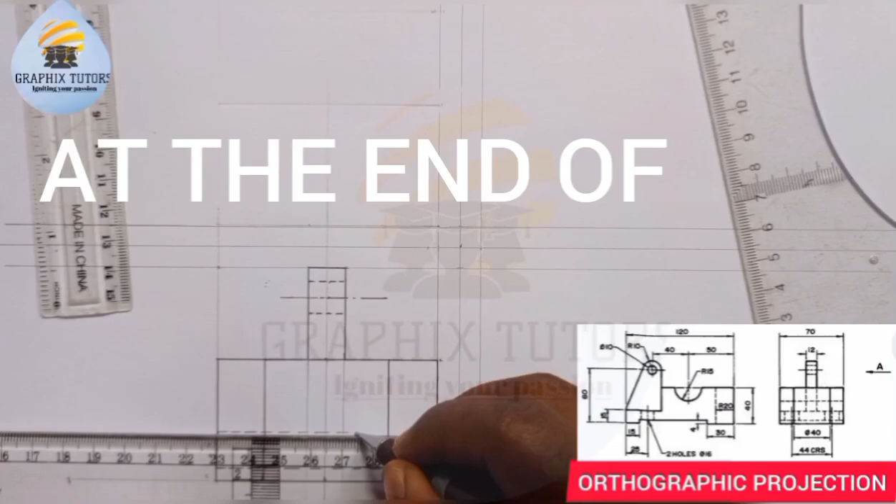Today I want to solve another problem involving orthographic projection. The question says two elevations of a bearing base are given. Do not draw these views, but draw a new front elevation obtained by viewing the given end elevation in the direction of A. From this view, project an end elevation on the right hand side, and a plan.

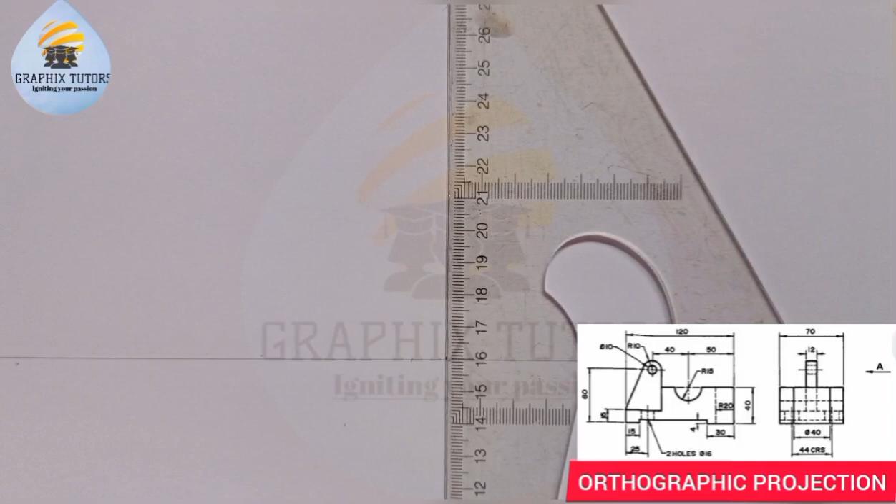Use third angle projection. Since it's orthographic projection, the first thing you have to do is draw your horizontal and vertical lines this way, this line, and also this line, all together. So this is what we have.

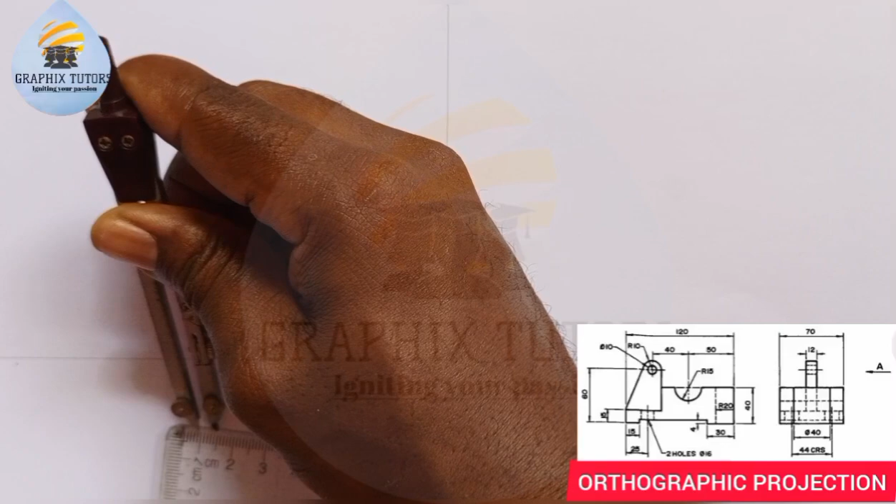Now you take your compass and measure 5mm each. If I take my 5mm from my instrument here, this is 5, right? Then you give a radius of your choice, place it here, and mark up, left, right, and down.

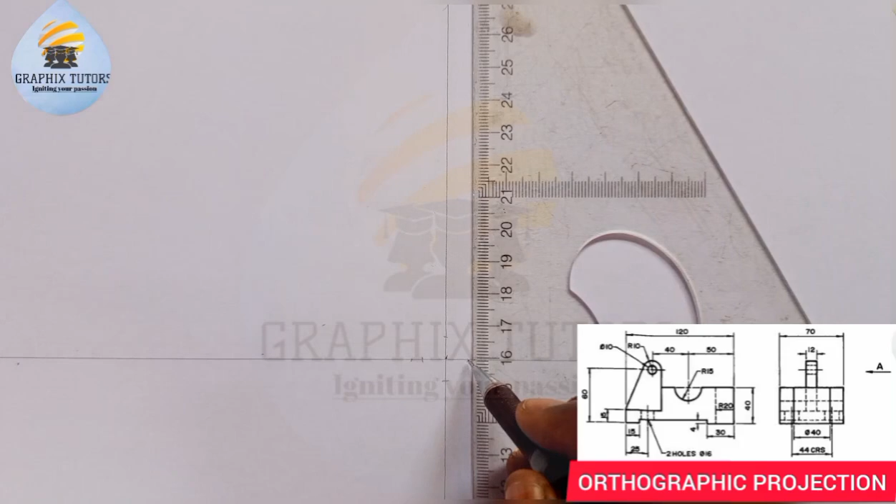So I'm going to project this upward, and this also upward. Then I'll do this in this manner, and also this in this manner. So this is the first thing you will do. Now I can just take this way.

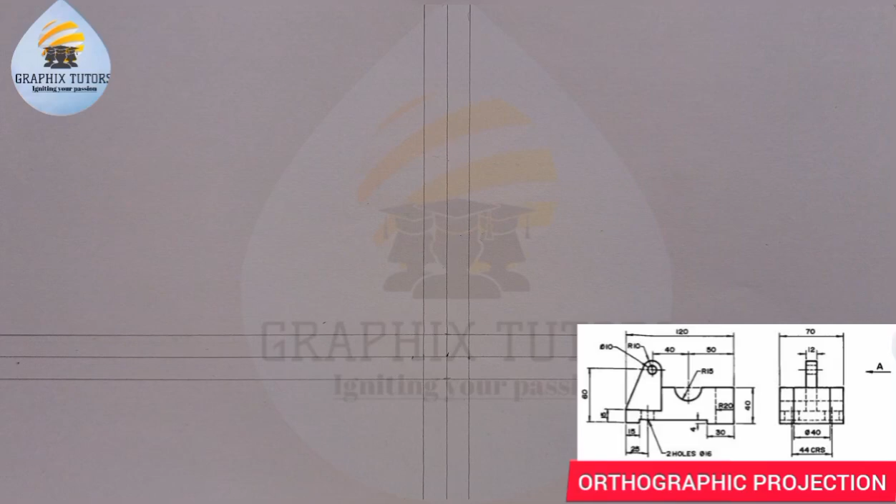Now the next thing you will do here is replicate that diagram you can see. We should look at the direction of A. According to the question, if you view the diagram facing the arrow here, this diagram will now be my front elevation. Since I am projecting it from this direction, this will be my front elevation, so I am going to draw this diagram back.

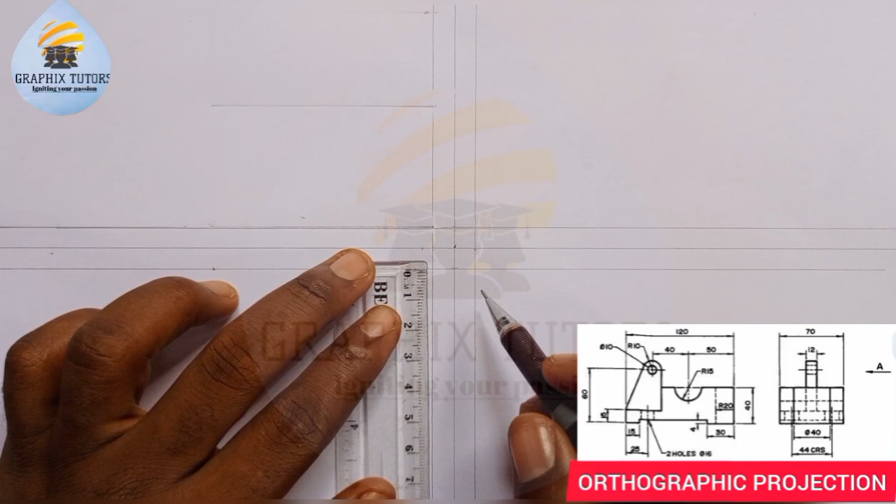We'll start drawing our diagram from here, static here now. So this diagram here, the entire length is 70, so I'll measure 70 from here. This is 70. And the entire height is also 70, because 60 plus radius of 10 here will give us 70. And I'll close it up.

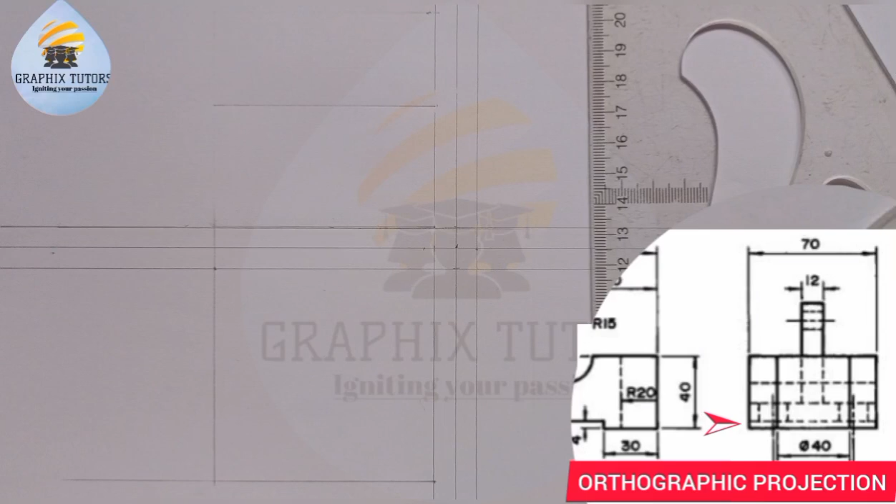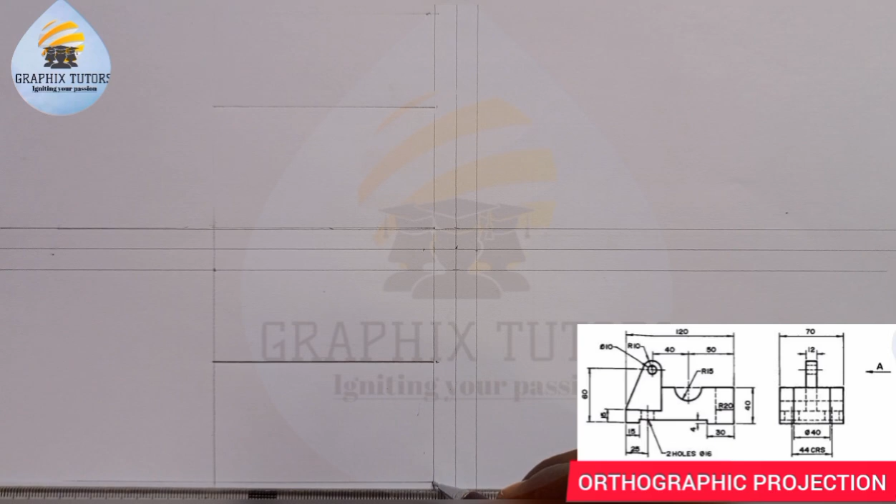Then the next thing is the thickness from here to here is given to be 40. I'm drawing this diagram first of all, so we have 40. So I have 40 here, and I'll close it up using a thick line, and I'll close it up too, and again, and again.

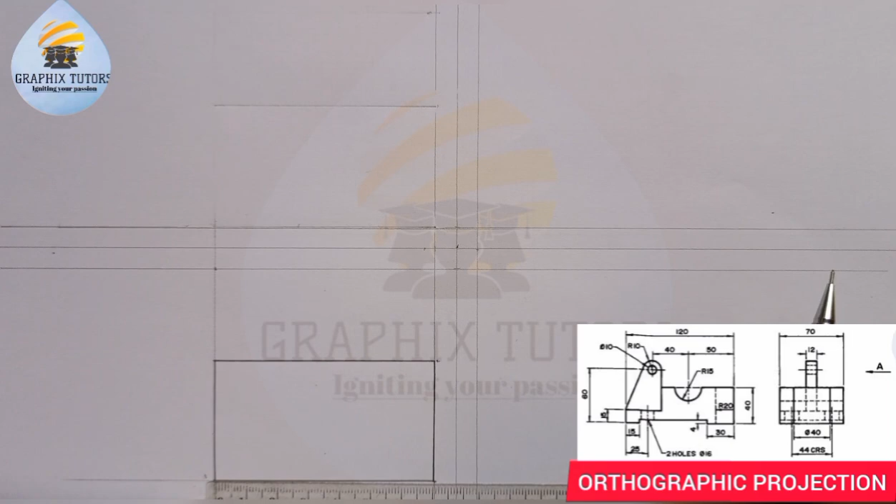So the next thing is I'm going to get the center of this line from here to here. Since from here to here is 70, half of it will be 35. I'll take it up. So from this point, the thickness is 12, so I'll measure 6 to both sides. This is 6 and this is 6, and I'll take it up.

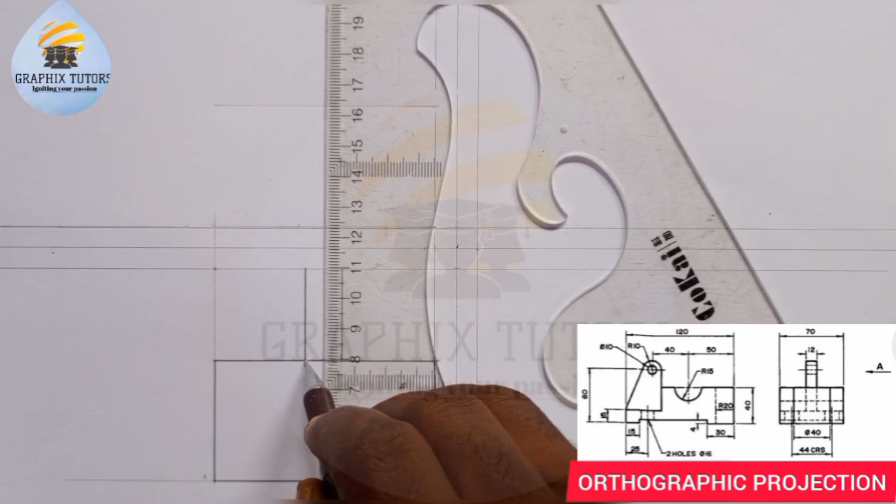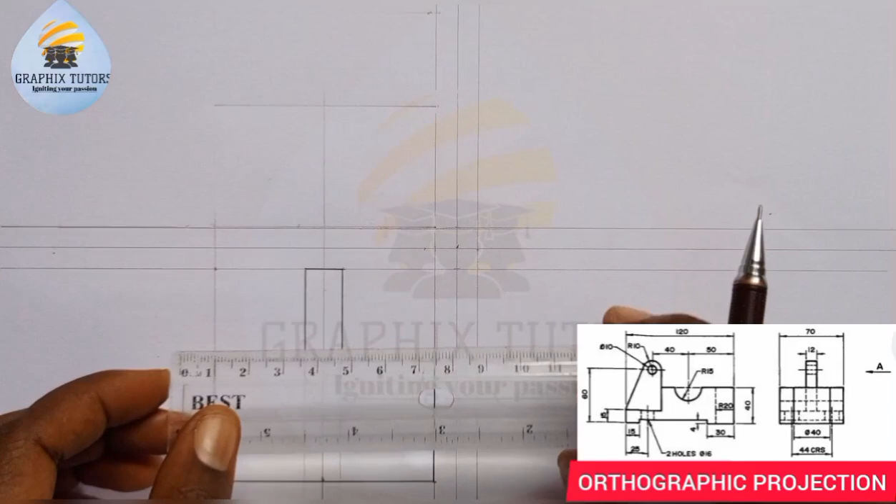And I'll close it, bringing my faint line down this way, and I'll close it up too. Now the next thing is from here, the radius of this inner circle is 5, because the diameter is 10. So I'm going to measure 5 each at this point here. This is the center here, 5 here. That's what we have there.

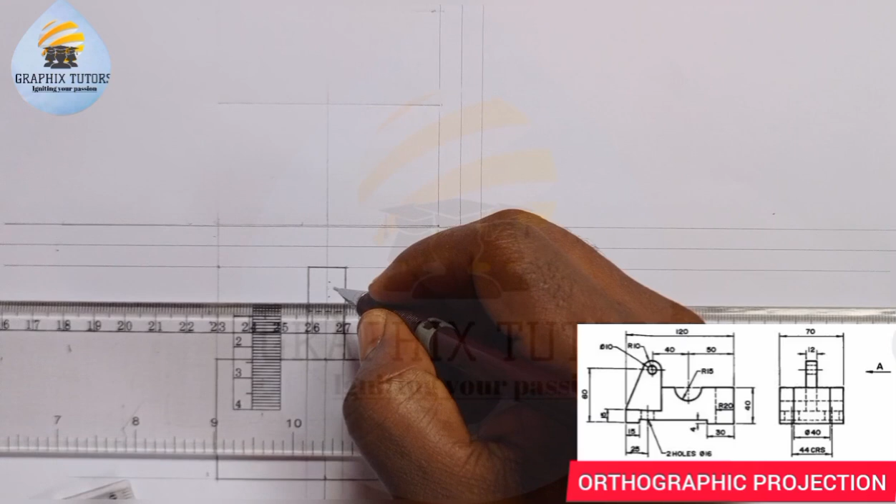So I'll just draw my hidden line here, and my hidden line here, then a center line here. So there's a circular object there.

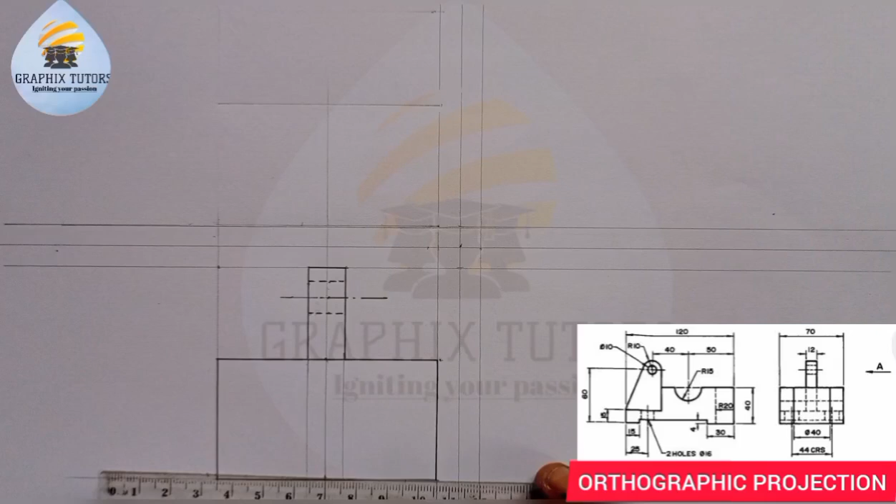Now the next thing is this true line from here to here has a diameter of 40, so 20 in between. Starting from here to the left, this is 10, 20, and to the right 10, 20. And I'll take it up and thicken it, and thicken it.

Now the next thing is the thickness down here from here to here is 4. So it's a hidden line we're using there, so I'll measure 4 downwards. This 4 here, and I'll close that up.

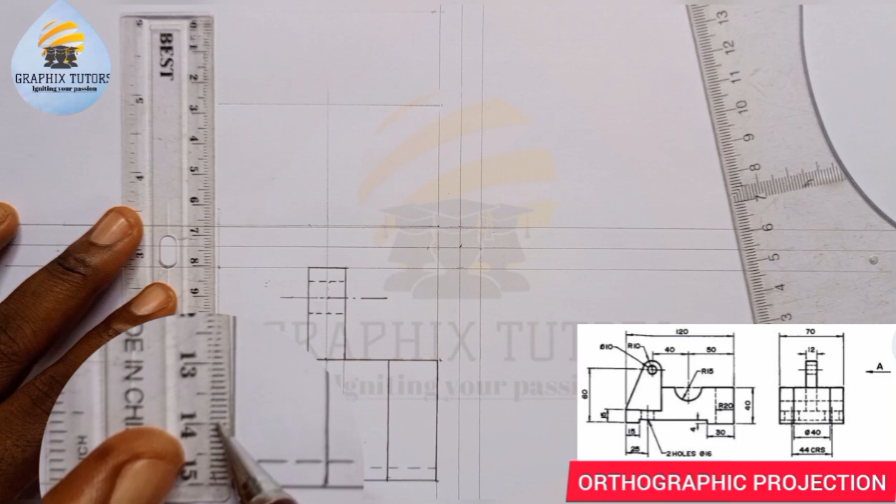And the next one, the height from here to here is 15. So from here to this hidden line is 15, so I measure 15: 0, 10, 15. And that'll be another hidden line.

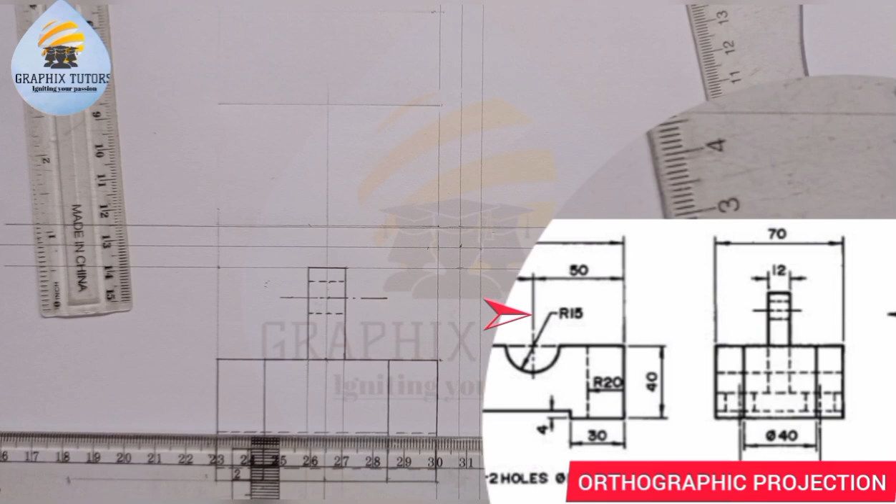Then the next one we're doing is from the top here downward, we have a radius of 15. From this side here, I'll measure 15 downward. This is 15 here, and I'm going to draw a hidden line.

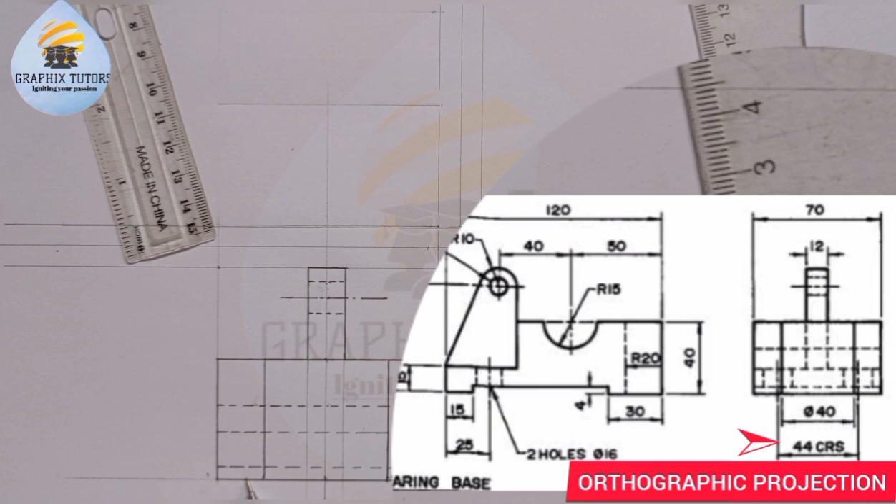And the next one is a circle. We have two circles here with a diameter of 16. To get the center of each circle, since we have 44 CRS, from this center I'll measure 22 to get the center of the first circle, and another 22 to get the center of the second circle. So I'll put it this way: this 10, this 10, 20, 10, 10, 20, 22, 22. So this is where the other circle will look.

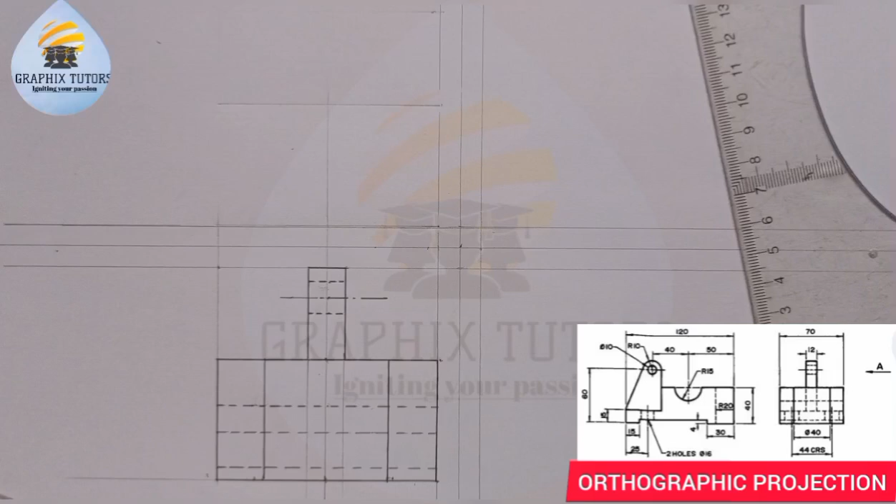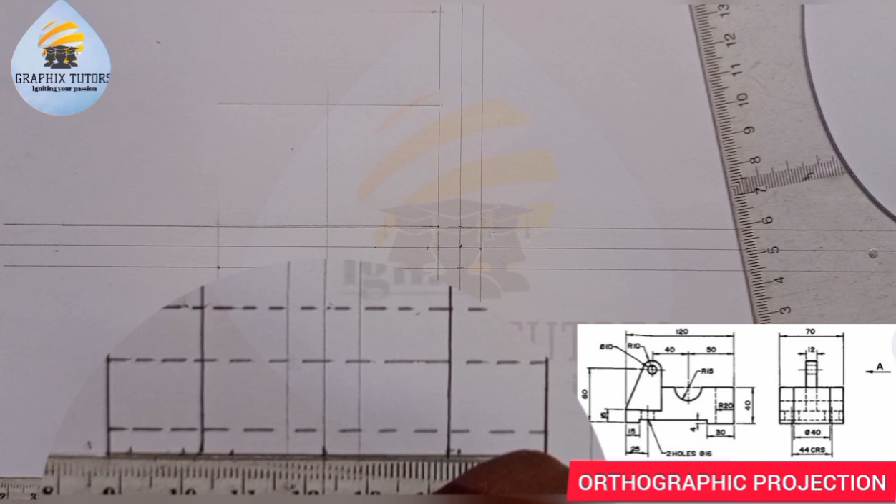Since it's a diameter of 16, here you measure 8 in both sides from here. So from here, this is 8, and from here also, this is 8, and that will be 8. Since we're having a diameter of 16, we'll measure 8 to both sides, altogether 16. So I'll come here also, I'll do the same thing. This is 8, and this is 8. So I'll just use my faint line.

Now take it up from this line here upward as a hidden line, and from this line here upward, hidden line. I'll do the same thing here too, and the same thing here too. So this is what we have.

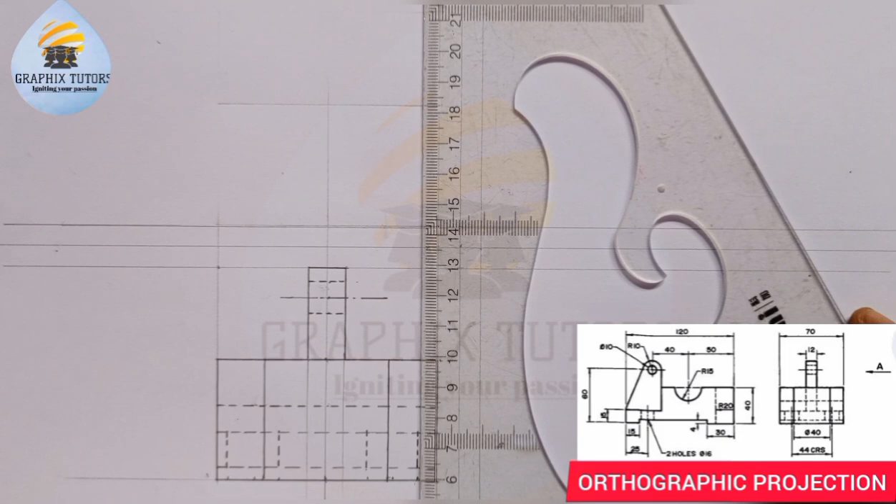I can easily bring this to touch 15 here, because this is touching 15 from here to here. So I'll bring this down to touch this hidden line, showing hidden features.

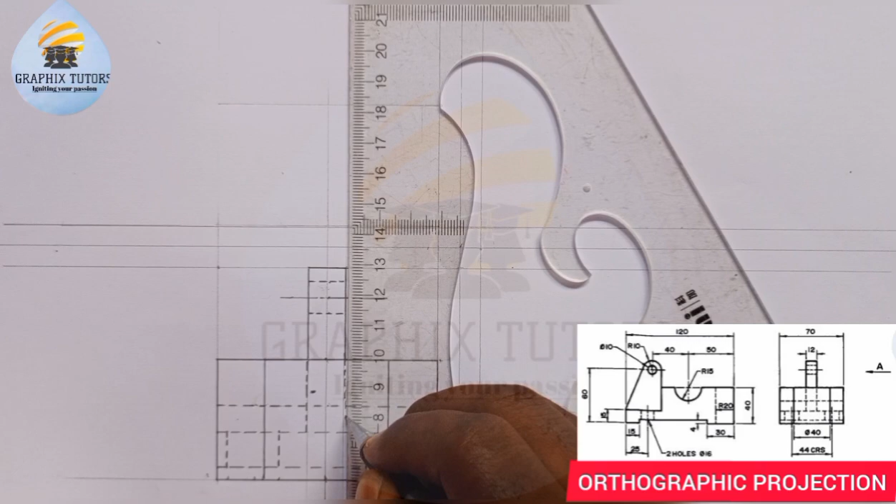This is what we have here. So I have reproduced this figure here that you can see.

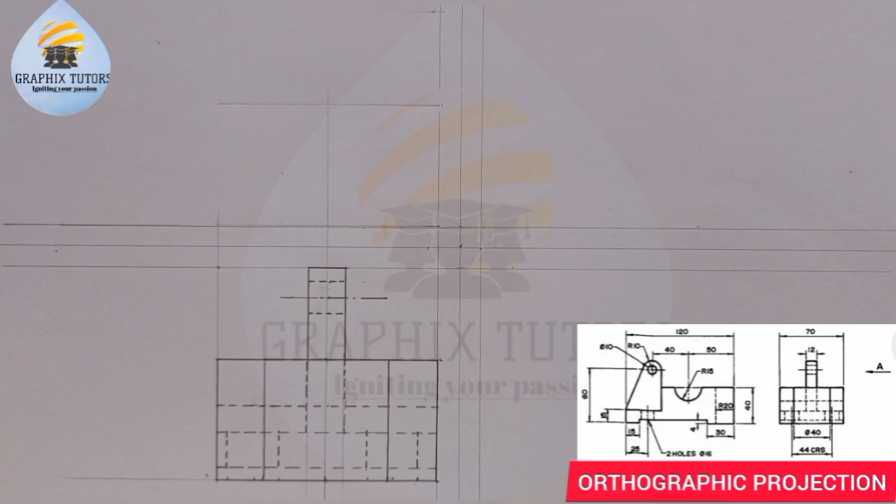Now the next thing is, when we're projecting it and looking at it, pointing at it this way, after the end elevation, what comes close to it? The front elevation, right? So my front elevation will be this.

Let's draw it this way. This is my front elevation here.

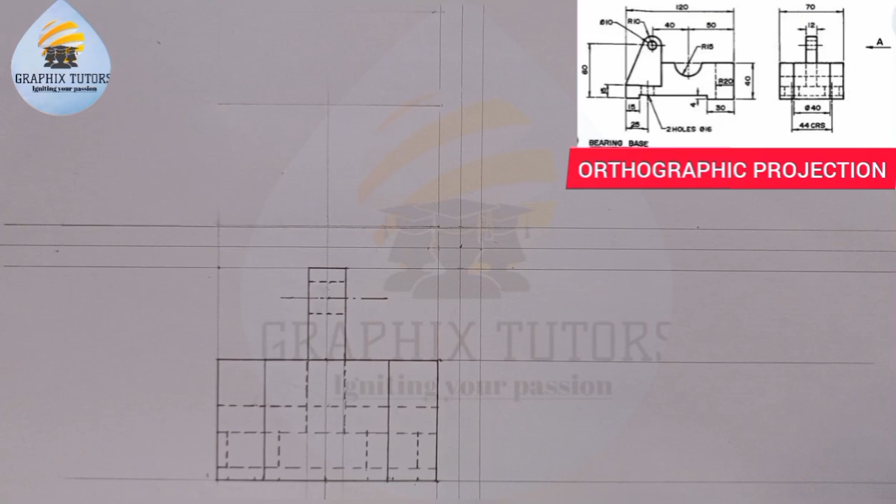I'll measure a distance of 120, from here to here, because the plan and the front elevation have the same length. So this is 120, and from here I'll measure 120.

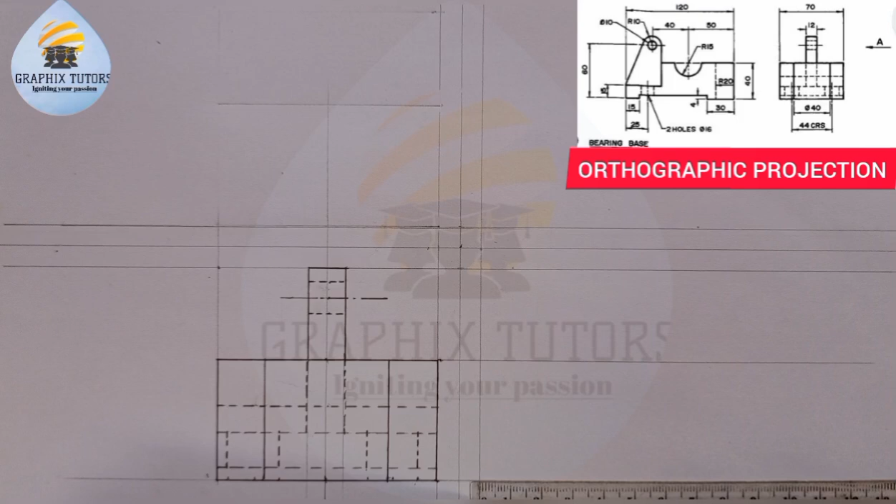Can you see that? Let me take it up a little bit so you have a view of it. So 120, from 0 to 120. And I'll take it up.

Now the next thing I'll do is you can easily project all these points here. I'll project all these points to meet at the other side.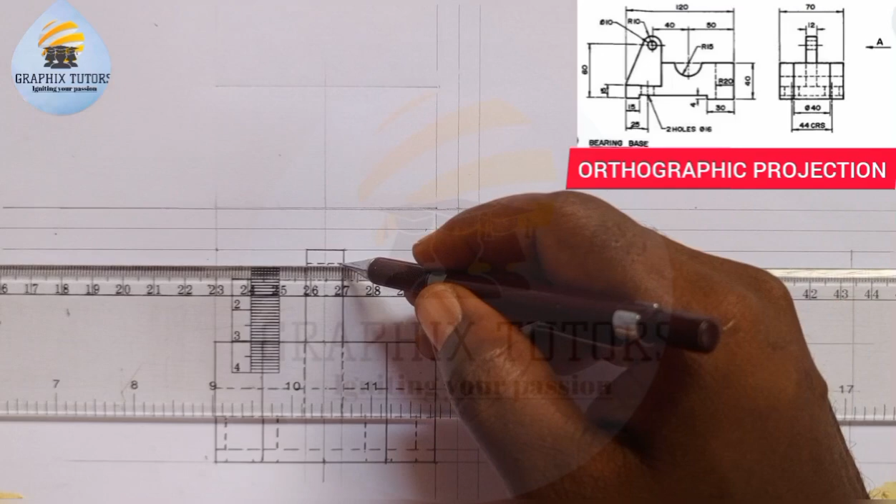Those faint lines, that's what I did here. So let's start. Now the front elevation here will be what you're seeing here. So let's see what will happen. What will just replicate will be this diagram here. It will replicate. So let's start.

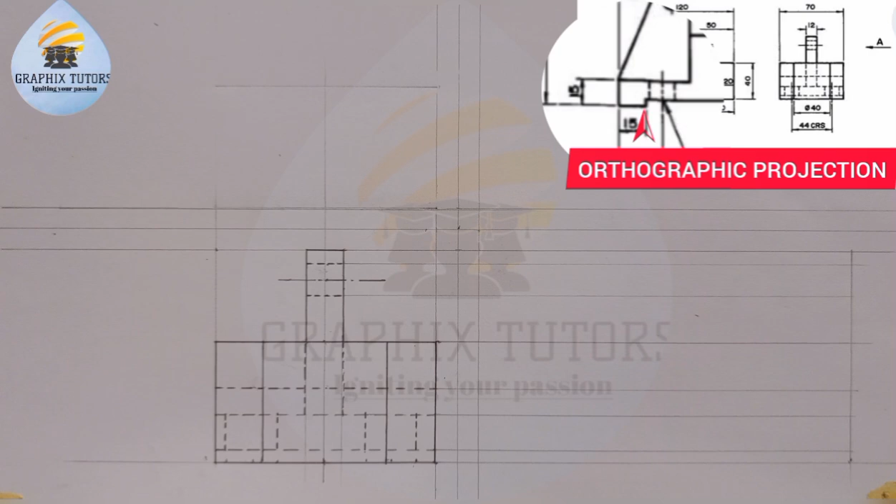From this point to this point here is given to be 15, and I'll measure 15. Measure 15 here, this 15.

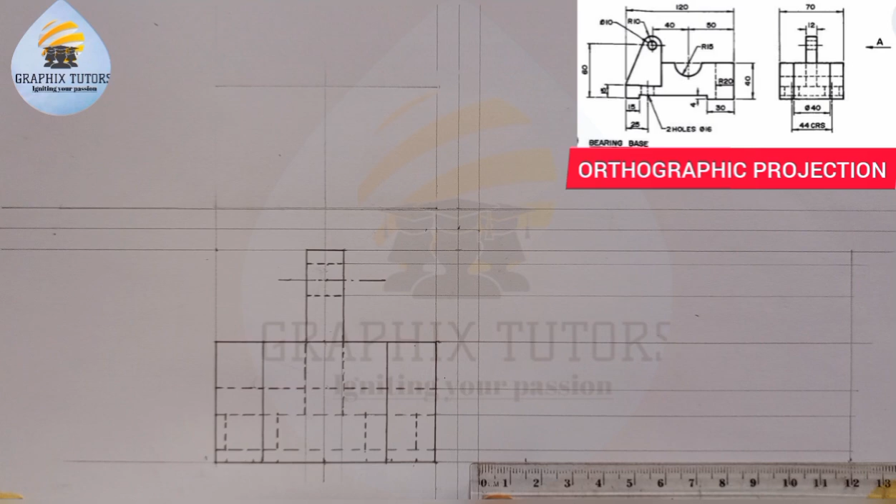And the next one is I'll thicken it, because in the diagram there it is thickened. 15.

And the next one is from here to here is 30. So I'll measure 30. Is 30 here, and I'll also thicken it.

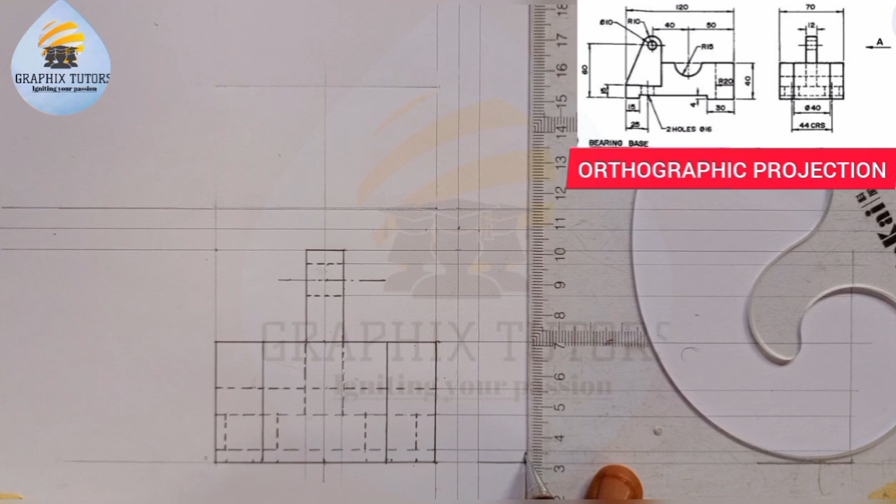You see that? And I'll take it up on this point to touch here, and from this point to touch here. Then I'll go to close here up.

Now the next thing is from here to here is touching this point here, 40. So I'll measure 40 upward.

And the next one is from here to here is 15, so I'm going to measure 15 upward here. This is 15 here. So I'll take it upward.

From this point to this point here is 15. And I'll measure...

I'll get the center. From here to the center here is going to be 50. Now measure 50.

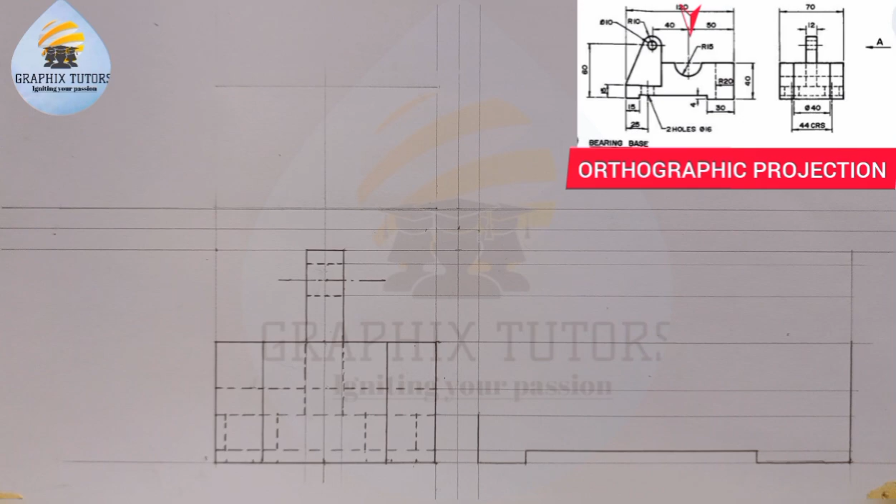Now draw the line that way to just use the center point, this point here. And the radius of that circle is given to be 15. Now I'll measure 15 this way.

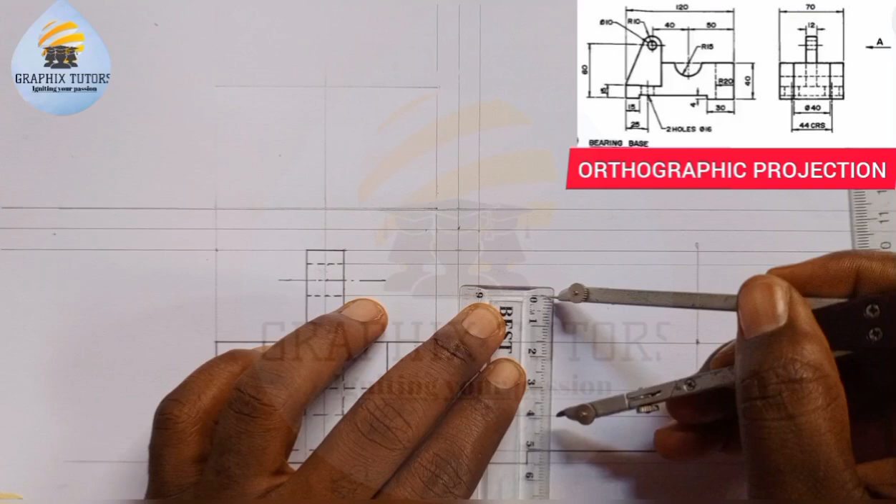You see that? Now place it here. Now draw a semicircle.

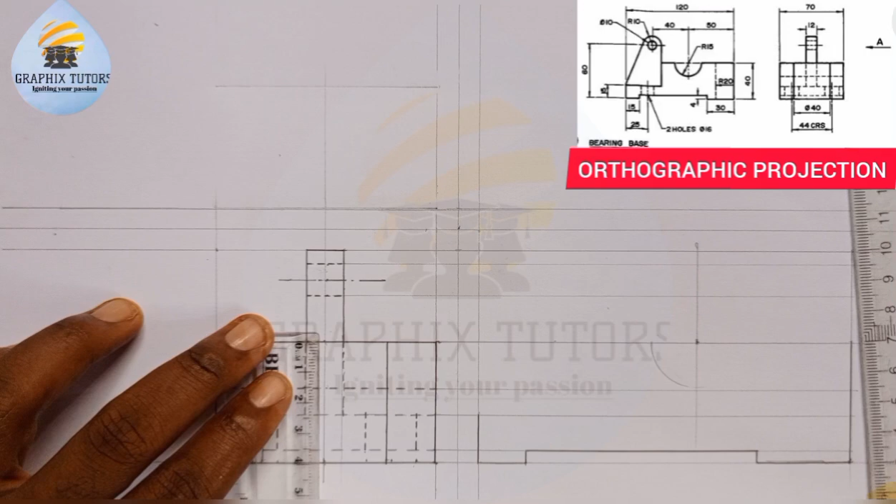Should be 15 from here, because from this point here to this point is 15. So that should be 15 too. From here to here is 15. So I'll just place it here to this point, and I'll measure my 15.

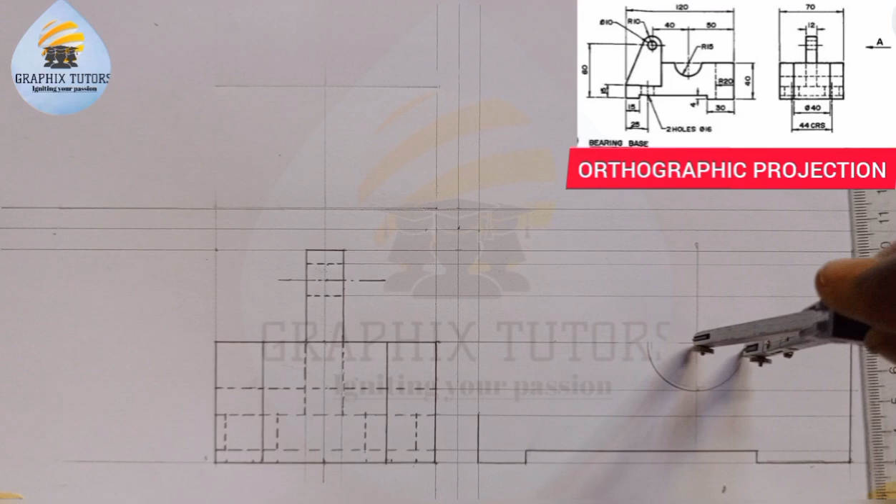And I'll close here up.

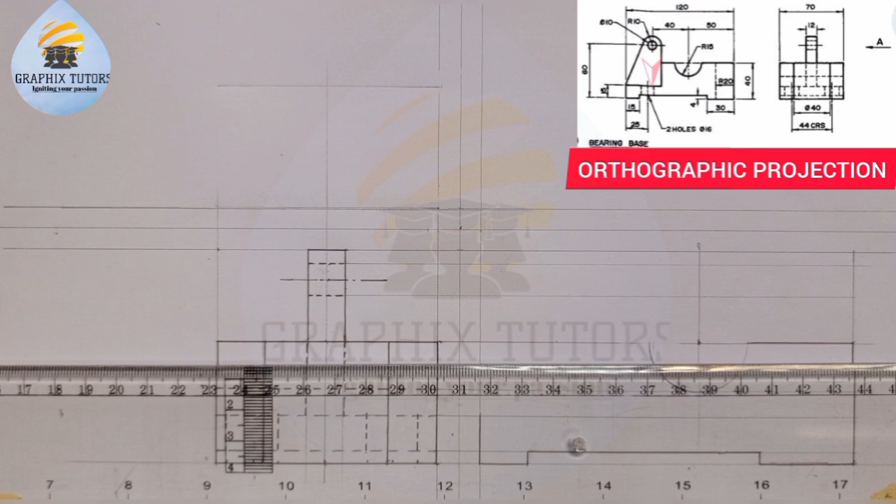Then from here to the next point, I measure from here to the other center, which is given to be 40, right? So I'll measure it again to be 40. From here, from the top here, I'll measure 40. This 40 here. So from that point, after measuring the 40, I'll now draw an arc.

I'll draw a vertical line down first of all. So I'll now draw an arc that has a radius of 10. So I'll measure 10 on my meter rule.

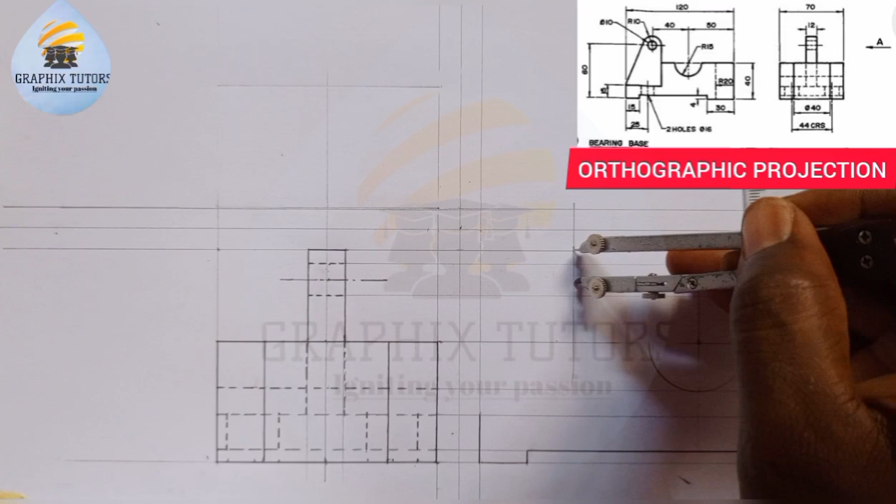I'll place it here, I'm going to mark, and I'll place it here. I'll now draw my semicircle here. You see that?

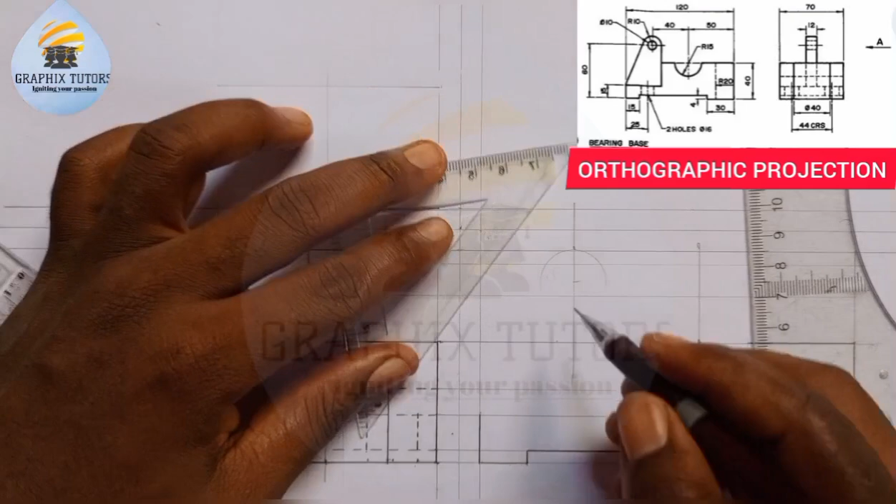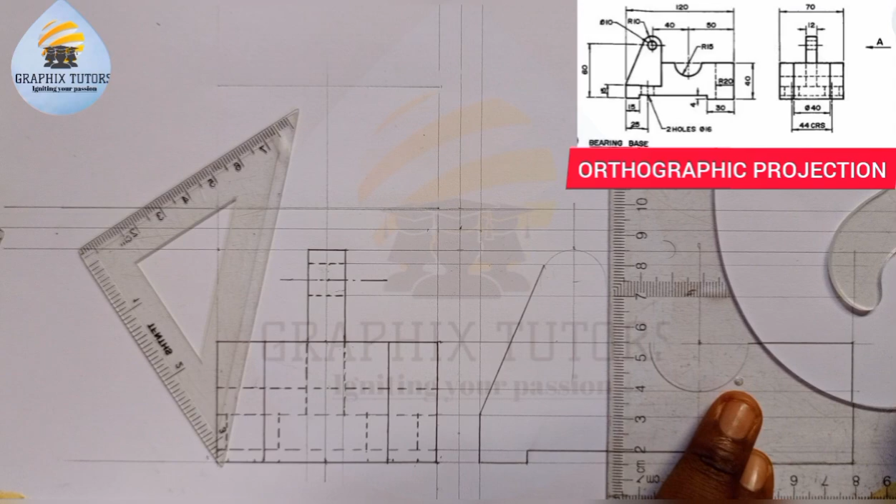So here will be tangential to this circle, to this point. You can see that. And the other one will be coming straight down and meet the line of 15. And here will be coming straight down this point, and meet this. So I can easily close here up this way, and also close here up this way.

So I can complete this, taking this circle that is here.

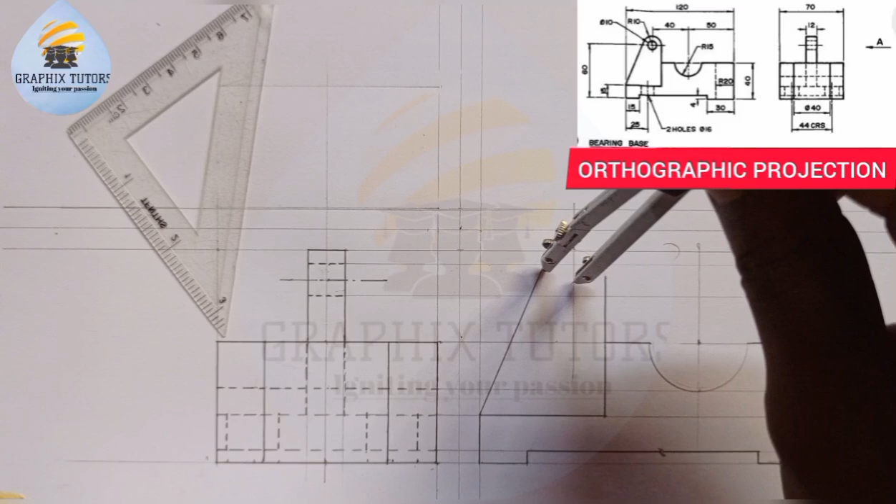Now, the next thing that we'll be doing here is the smaller circle there that has a radius of 5, since its diameter is 10, the radius is 5. So I'm going to measure 5 here.

And I'll draw this. And see that? The what else again do we have that we've not drawn here? So it is this center circle here.

There's a hidden line here and has a distance of 25 from this point. So I'll measure that. This 25 here. And I'll take it up to my faint line.

With those faint lines first, so it's on that line. I'm going to measure...

The diameter there is 16, so I'll measure 8 to both sides. Taken from here, I'll measure 8 to both sides. This is 8 and this is 8.

So I'll just draw my line this way.

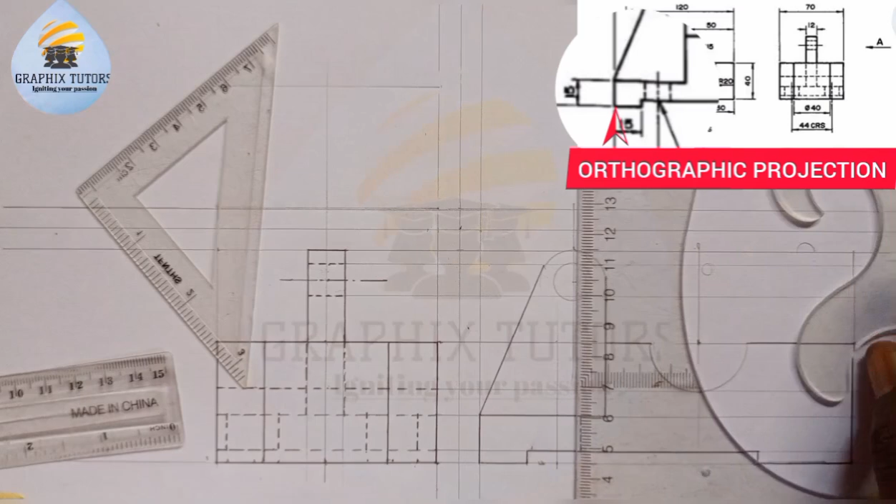You can see that. So once you've done that, we've successfully reproduced the figure shown.

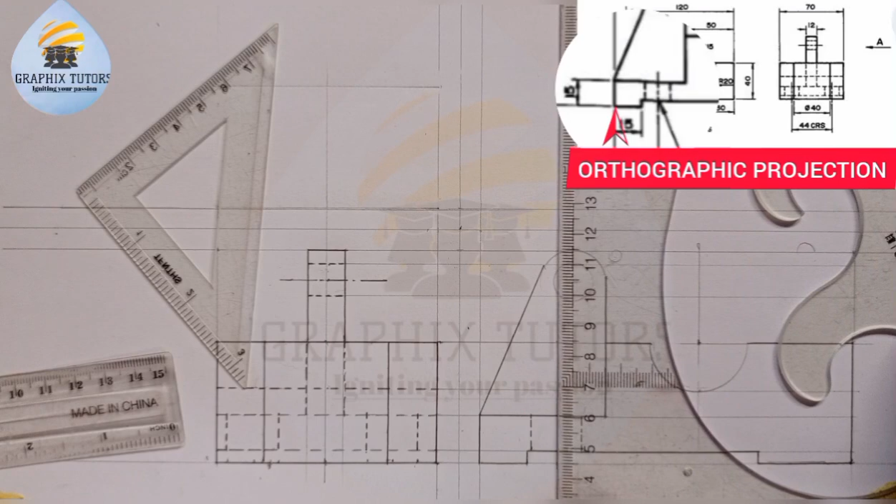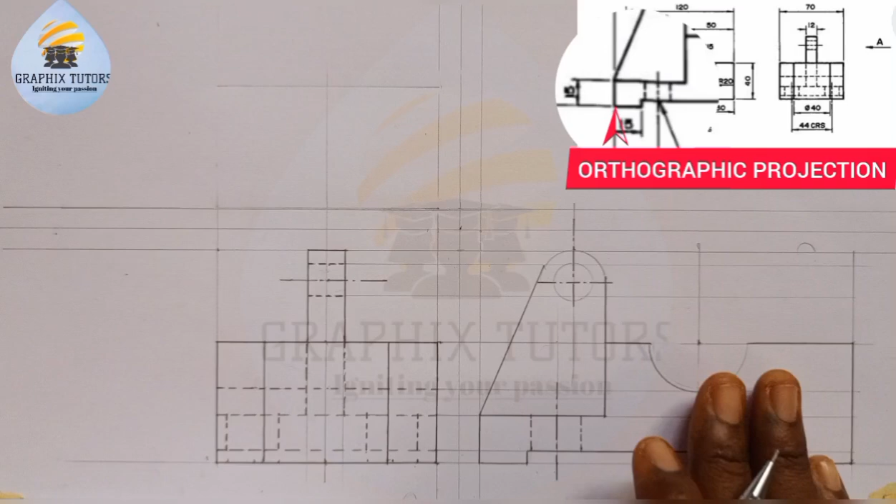Let me draw my center line here, and also center line here, and also center line here. I'm redrawing this because the question says we should not redraw the same diagram, but should draw the one we want. So starting from here to this point, this is my front elevation, this will be my plan, and this is my end view. So my end elevation, new, new, we'll proceed.

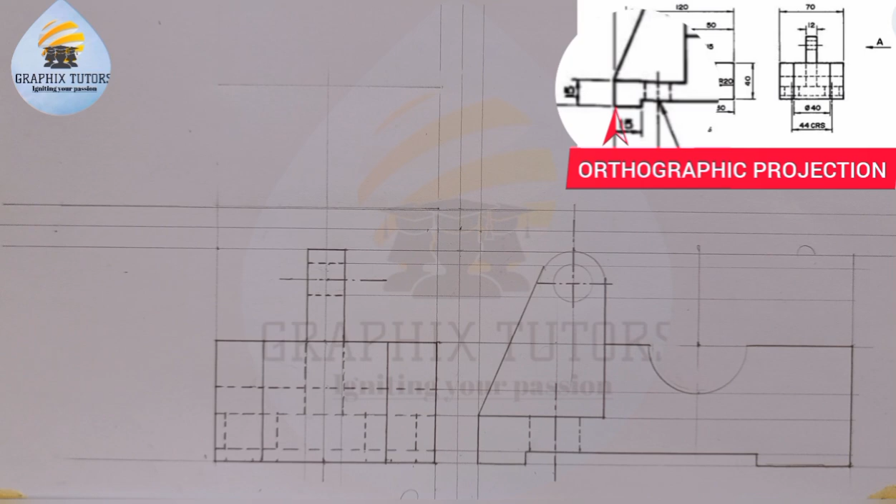So from here we've drawn this. Now the next thing is for us to project this upward in order to get our plan. So I project this upward.

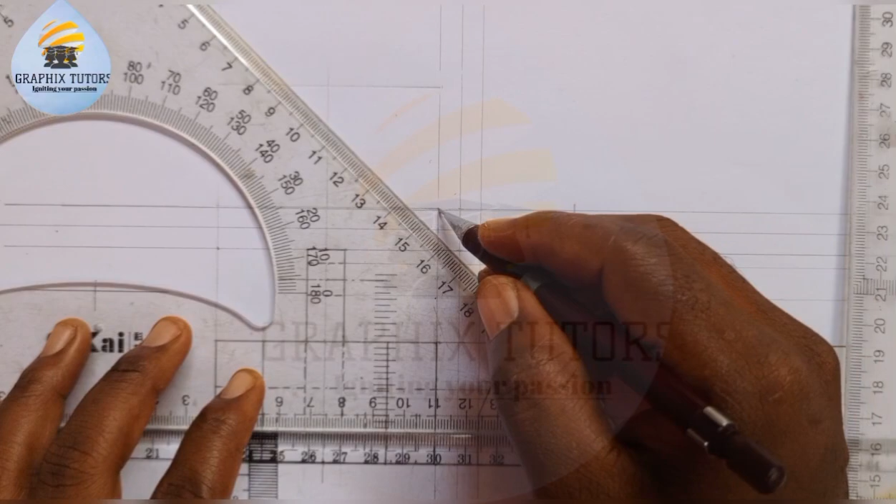First, use my 45 degree set square. From this side, place it this way, and I'll draw it this manner. You can see that? And I'm going to project this upward.

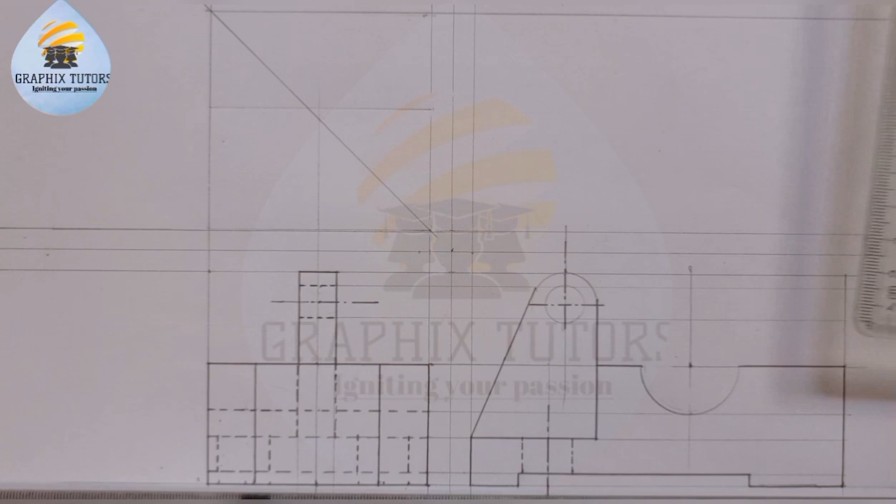These two ends here, first take them up, and I'll close it up. Also from here, I'll close it up too. Let me bring this down a little bit. If I bring this down, just take this here.

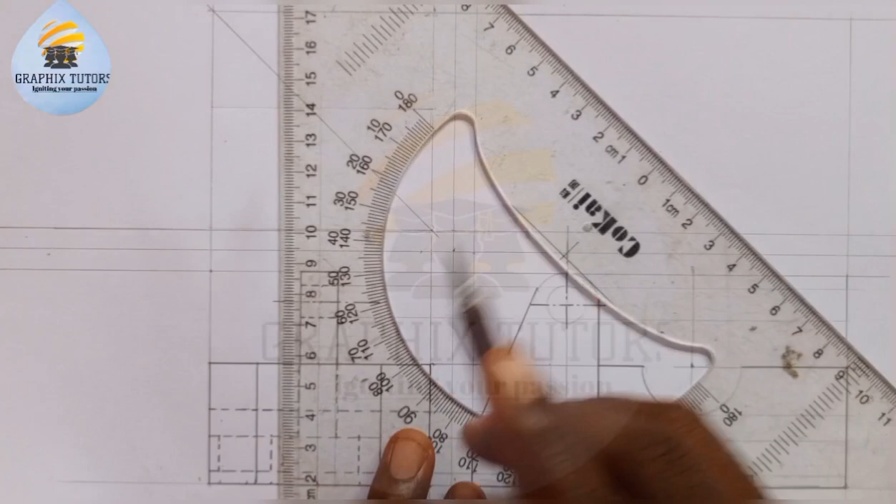So the first thing we'll get in our plan is to project all these ends. We project them up. Let me start with this one here, and this one here. So when I project it this way and this way, what will I have? Then I'll come.

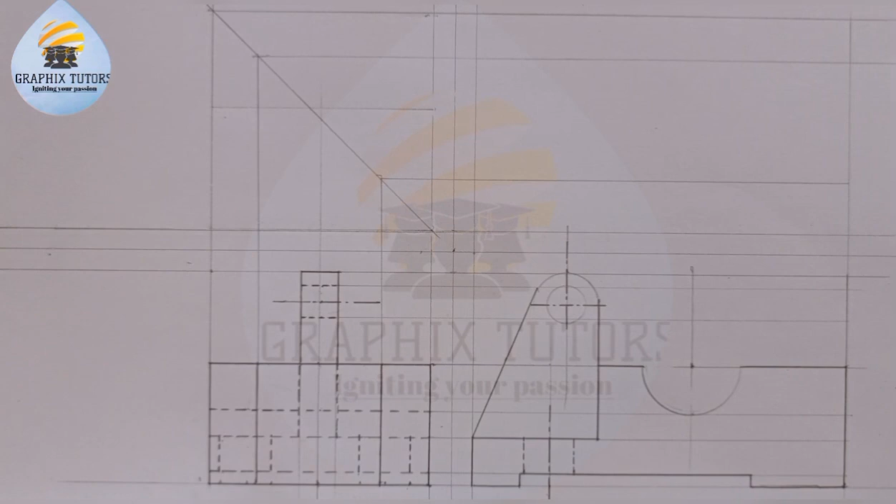Don't forget that we have a distance, a radius of 20 from here. Let me put that before I forget. It's 20 here. That will be the hidden line as shown in the diagram.

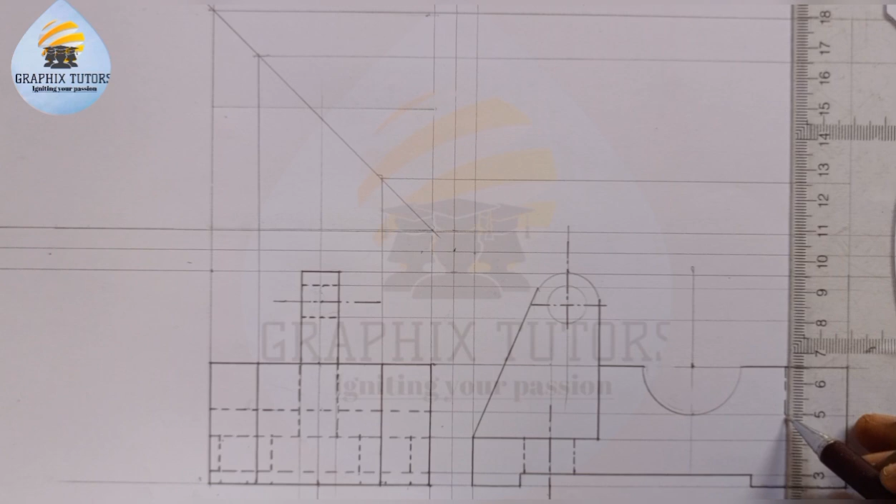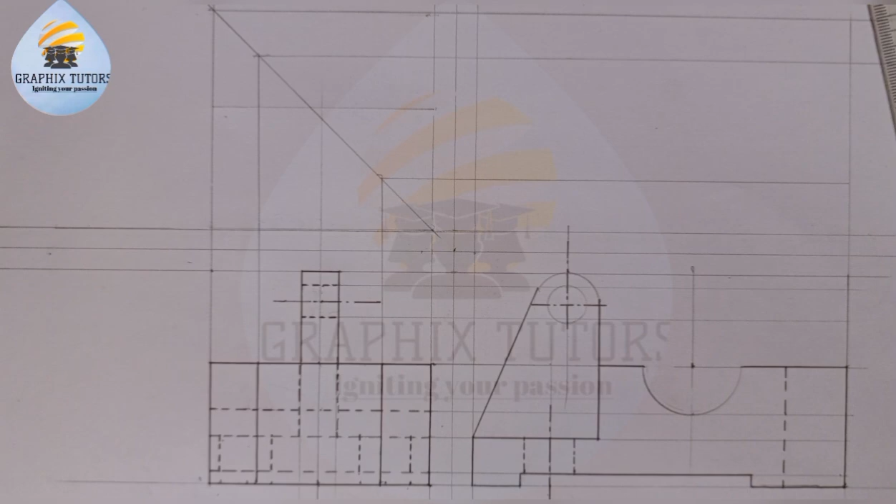So when I do this, I'll be having some projections. I've done that. So these two points you're seeing are connected to this hidden line here. Check the diagram closely, because I'll come here and take this upward this way.

So what I'll just do is project the center line too. This is the center line I'll have, and I'll get it this way. With the help of my compass, once I place it at the center, this point here, once I place it here, I'm going to be having this.

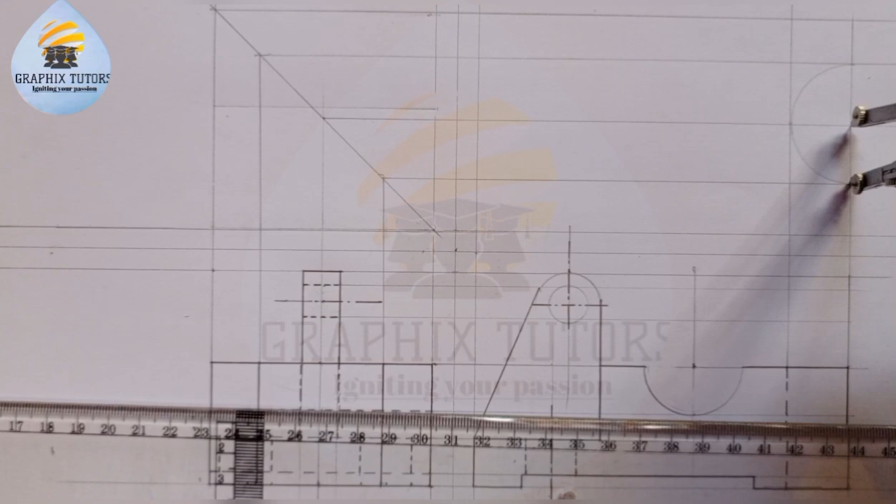This is it here. This is the first thing we'll do. And I can easily close it up and also here, up this way.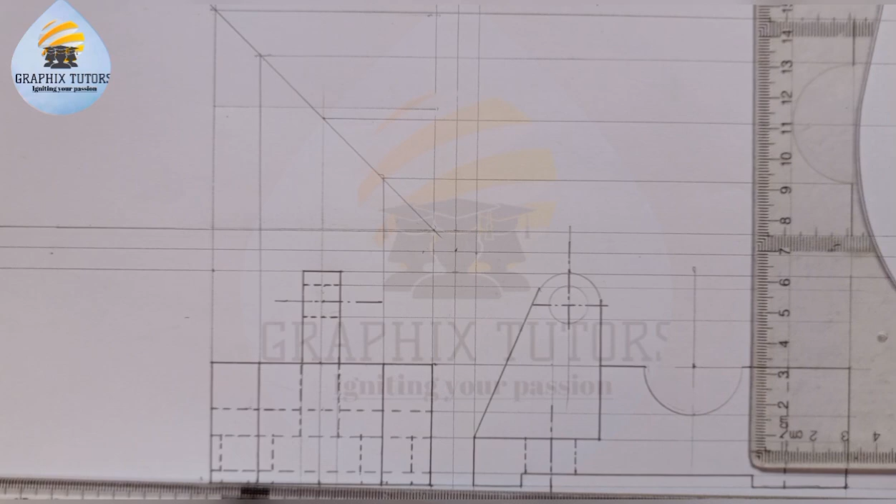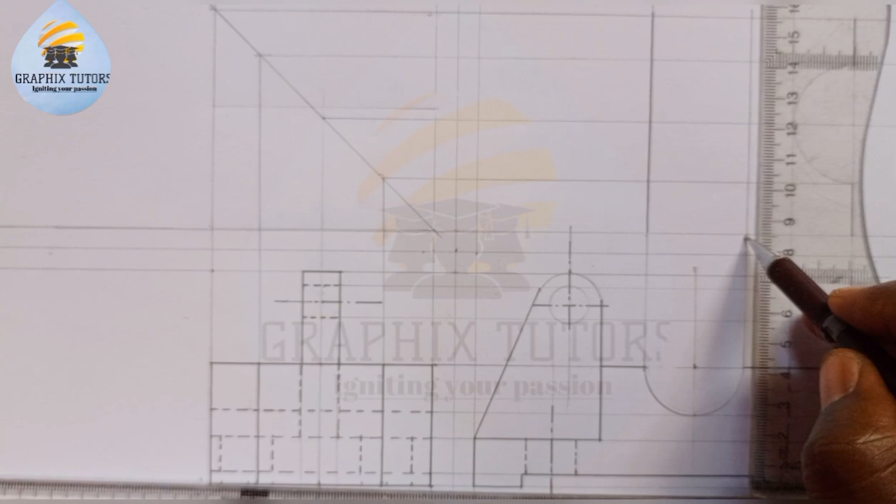Then the next thing we're going to do is I'll project this up to this point here, and these two up. I'm going to thicken from here to this point, and also from here to this point. Then the next one is I'll project here too, up, so I'll thicken here too from this point straight down to this point.

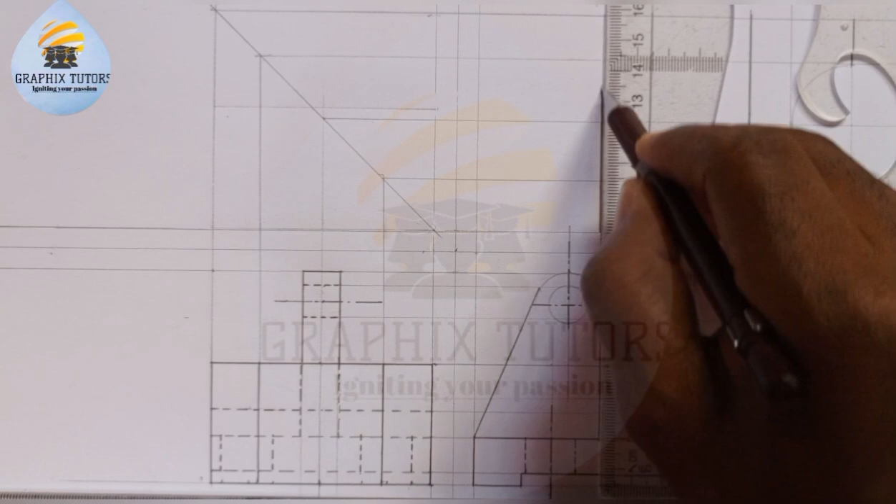And this point here, if I project it up to touch this inclined line, and I project this up to touch the inclined line too, I'm going to take them to this point here, to touch here, and from here to touch here. So these two lines I'm going to thicken, and I'll touch the end line here, and I'll now close that up.

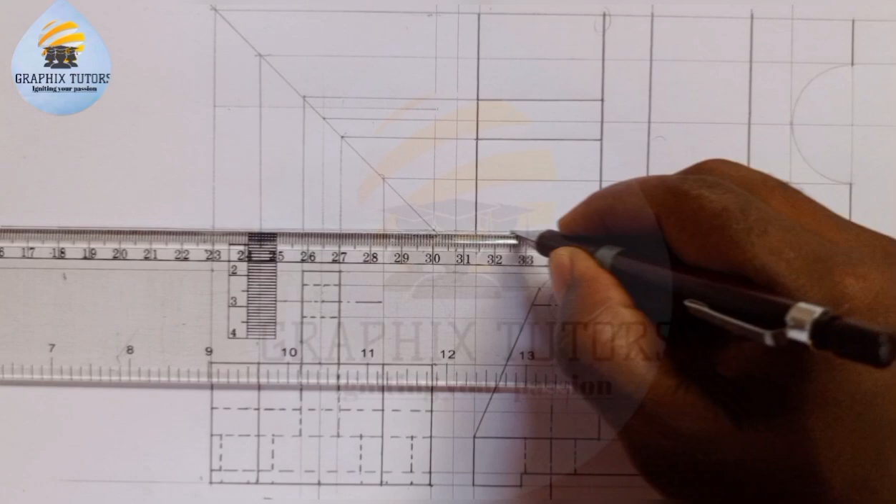And I'll close here up too, and I'll close here up too. Right, so what we have here.

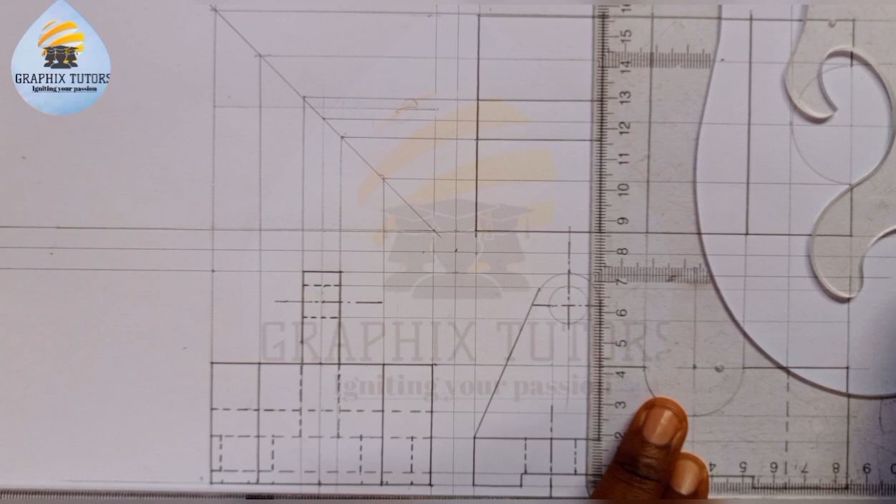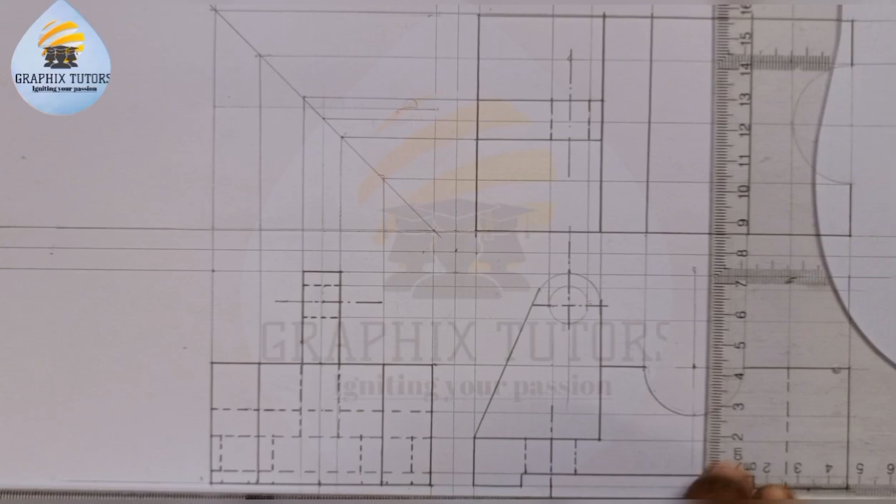If I project these two circles up here, here will be hidden line, and here also will be hidden line. And my center line to show that the circle is there. Now the next one here also, my center line to show that there's a symmetrical object there, just like here too.

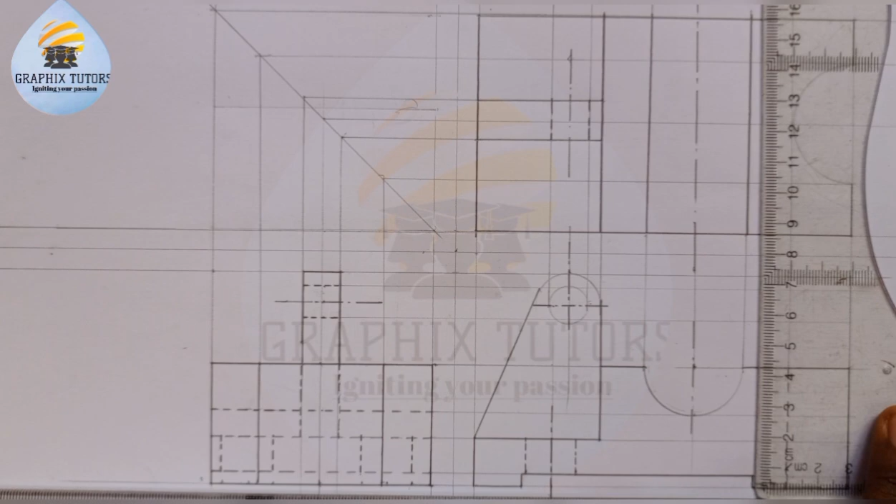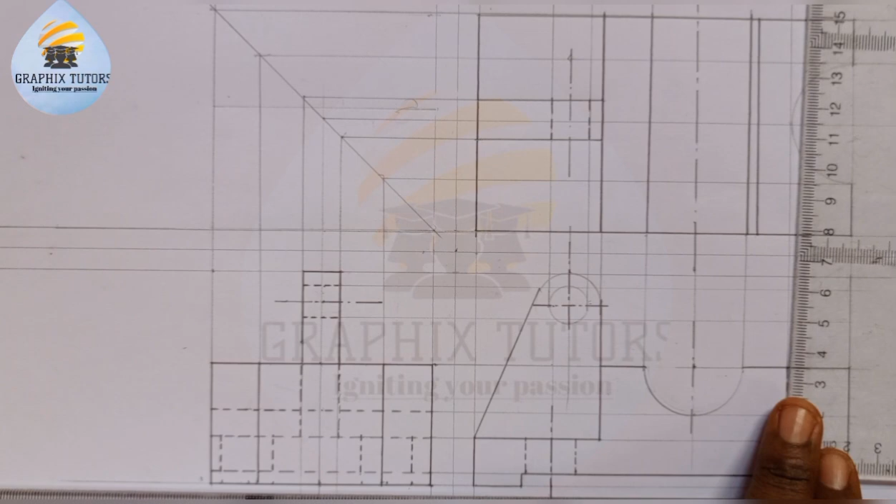So I'm making it hidden line. Then here also, hidden line, because of this line here. Then what else are we missing out?

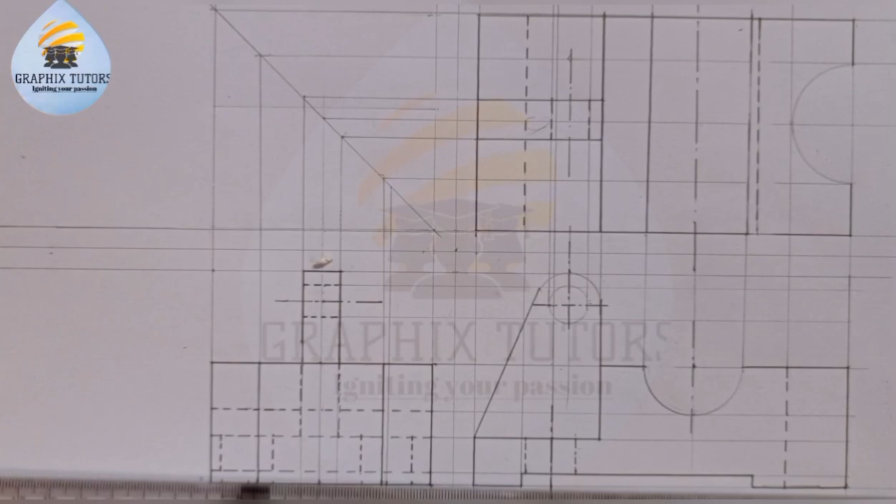The circle here. So if I project these two hidden lines up, or better still, I'll just go with the center, and I'll go with these centers too. So once I project the center that we have here, where it cuts this center, where the center cuts the other center here, I'll draw a circle that has the same radius as this here.

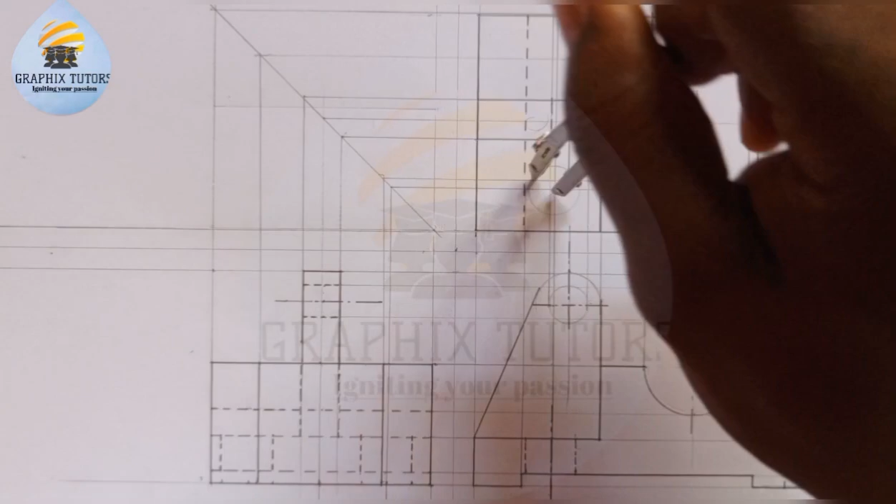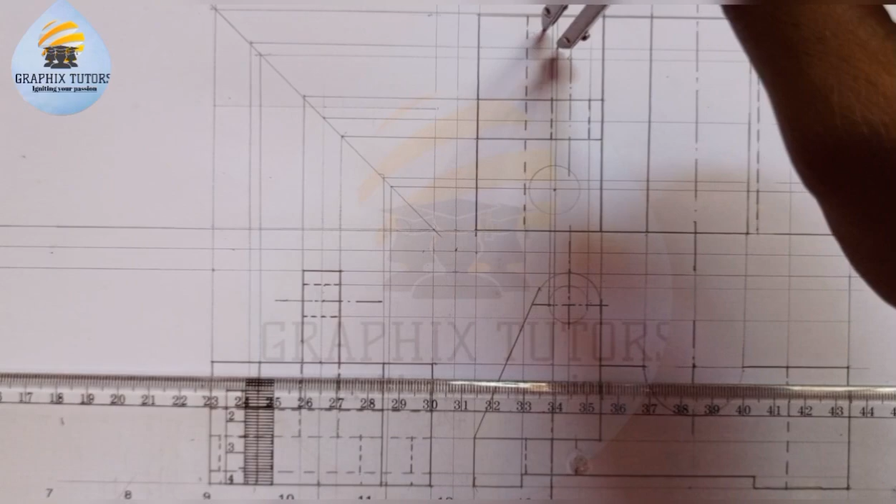Similarly, when I project this one up to the center here of the circle, where it cuts it again, this is it here, I'll have another circle with the same radius there. You can see that. So this is when you're looking at it from this side coming down.

So what else are we missing out here? What are we missing out?